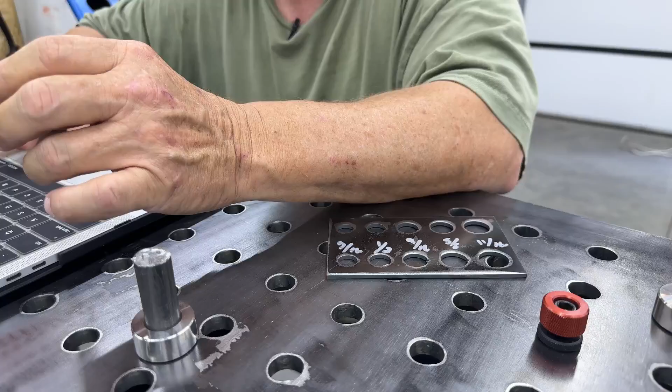That's me. Anyway, today I wanted to go over just a short video tutorial with Fusion 360 that even a beginner could take and design and build something on their own. So I know I've talked about in previous videos this fixture table that I just recently built, and wanted to go over a couple of things with you and show you before we get into the design process in Fusion 360.

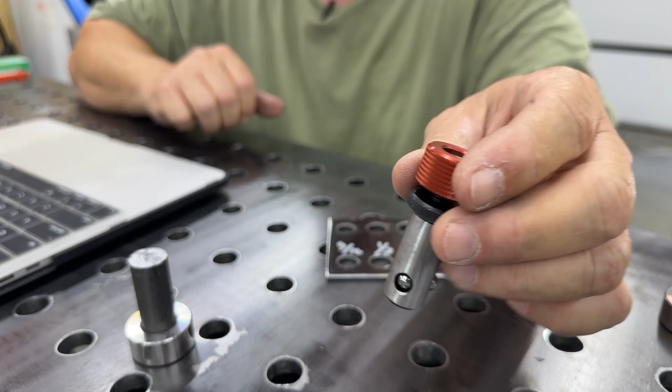But anyway, I bought a bunch of these little screw down clamps from Build Pro on Amazon so that I get a good clear picture of that. These are pretty neat. They've got ball bearings in them. You can see they're flexible, and as you screw this down, it pushes those ball bearings out and creates a lock, so they won't go anywhere after they're screwed down tight. And when they're not, they're flexible and they just slide right in the hole.

No problem at all. You notice I've got a lot of slop here. That's a different explanation. We might go into that in a different video. But anyway, when I had this table designed, I asked the guys down at the steel place to make 5/8 inch holes, and they asked me if I wanted them just a little bit bigger, and I should have said no, but they made them a little bigger, and now it fits more of an 11/16 here. I don't know if you can see that, but it fits more of an 11/16 design.

I had to remake all my fixtures to fit them in, but these will work just fine with what we're trying to do. The only issue, and I don't know if I can get a good clear picture here. Let's go back here where you can kind of see. So if I drop that in and tighten this up all the way, you can see I've got a long way to go before that's going to lock. To be exact, it's about 5/8 of an inch.

So I'm going to design some squares where I can square up whatever I happen to be welding together, and I'm going to just put a lip on it similar to a speed square. And I've got to create some holes in my new squares. I'm going to need 4 of them. So I'm going to have to design something, and I want it to where it's going to be tight on this and will fit loosely through the table.

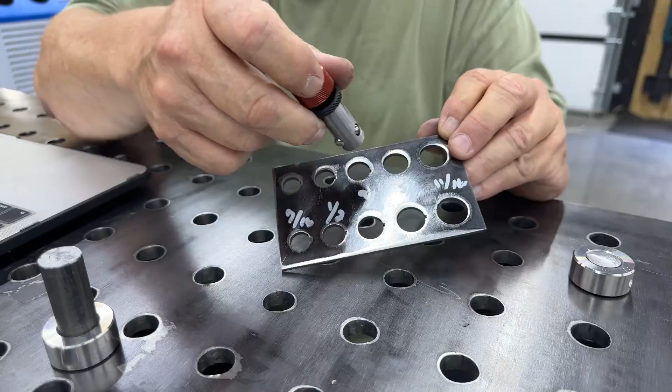So let me just unscrew this, and I did a little chart here that shows you different sizes ranging anywhere from 7/16 on up to 11/16. And these are the 32nd counterparts. So you can see this is supposed to fit a 5/8. If we push those ball bearings all the way in, and I push that in the 5/8, I still got a lot of slop. But if I take that down instead of a 5/8 to a 19/32, which is that hole right above the 5/8, a 19/32, then I get a much tighter fit.

And that's because of the kerf of the plasma cutter. The way I do my cuts, I have a 0-degree plunge where it comes straight in on the line, and the width of the kerf for that plasma cutter is a little over a 1/16. So I found that if I make my cuts just a 32nd smaller, they tend to fit perfect. So we're going to make all of our cuts to fit that 19/32 mark as opposed to a 5/8. So anyway, I hope that helps you understand what I'm trying to do.

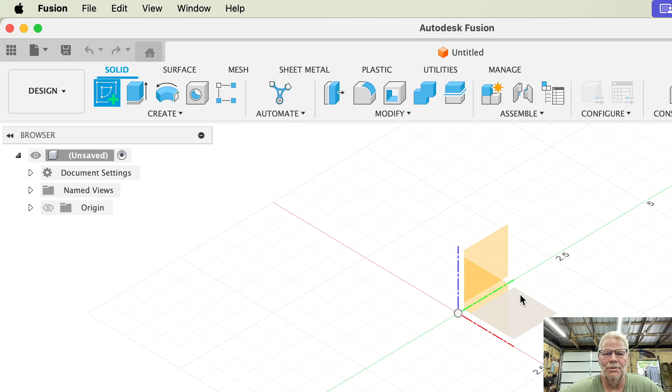So let's get right into it. We're going to open up Fusion 360 and start with the design process. So we've got Fusion 360 open. We're in the design section, and the first thing I want to do is create a new design. We always go into this quadrant over here, not this upper quadrant, but this one, and click here to start a new design. And your screen should look just like that.

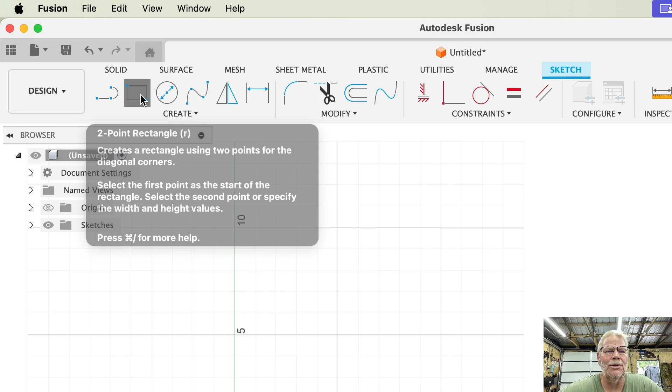I'm going to pull it over here and shrink it down just a little bit, because we're going to do a 12x12 triangle, and then we're going to insert some holes so I'll be able to peg it down to the table. So let's go ahead and get started. First thing we want to do is go up here to a 2-point rectangle, and we'll start down here in the bottom close to the corner, and all we've got to do is hit 12 inches that way, tab over, 12 inches that way. Alright, so we're good to go there. My next step in the process, I want to create some holes going up and down both sides. So let's go ahead and draw one of our holes.

And we'll be able to move this. We're just going to start one, and like I said, we're going to make this hole 19/32nds. If we made it 20/32nds, that would be 5/8. So we're just going to make it 19/32nds, and that'll be our first hole.

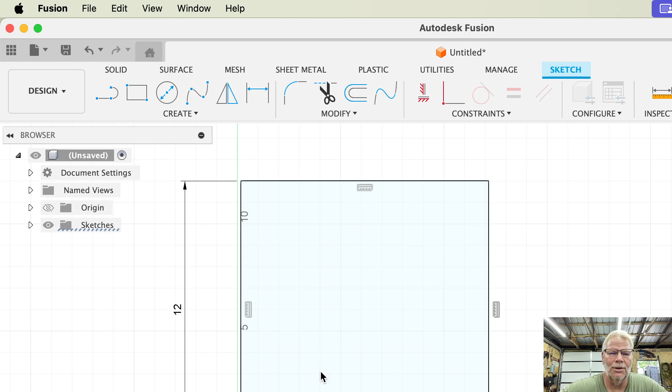And I want to leave myself some room to be able to weld onto the edges there, so I'm just going to kind of blow this up a little and eyeball it and see if I can get my first hole about where I want it, which I think about right there looks good. And then I'm going to draw me a construction line going up and down that I want to put my other holes into.

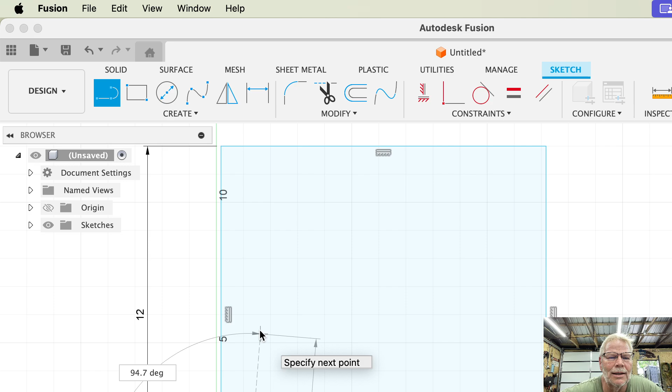So let's come over here to the line, and all we got to do is check right here to get a construction line. That's a line that we're going to draw, but it's not going to cut. So we're going to draw a line across here and double click, and then we're going to come down this way, and we want to stay centered, so we're going to click it right there, come up, we're at 90 degrees right there and 12 inches, so we'll stop right there. So that's going to be the line that I'm going to draw my holes on.

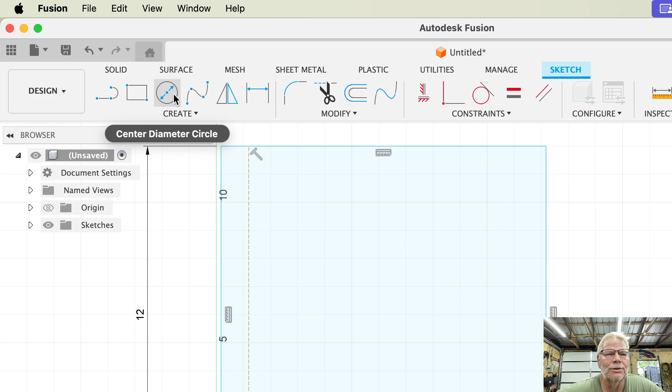So let's swap it off of construction line. Let's go back and create some more circles here that are 19/32nds. And I'm not sure how many of these I'm going to want. I'm going to space them on 2-inch centers here in a minute, because that's what my table is. So I'm just going to randomly put them in here for right now. And I guess I could put them at 4-inch intervals, but we'll just stick to this right now. And just bear with me while I draw these out.

Alright, and then I'm going to take my little measuring tool here just to see kind of where we're at. So I'm going to measure from the center of that one to the center of that one. And you'll notice that says 1 inch. I want 2 inches. Whoops, didn't want it to go that way. So we're going to spread this out a little further to get that to go where we want it to go. So let's scoot these on down. Get them out of our way.

Something's pulling that one back. I'm not sure what's going on there, but let's just keep rolling this way. And it appears like that one's not really on my line, so I'm going to delete that one and create another one. So let's go back here and start it right there. 19/32nds. Okay, now let's try again and see if we can get our spacing correct.

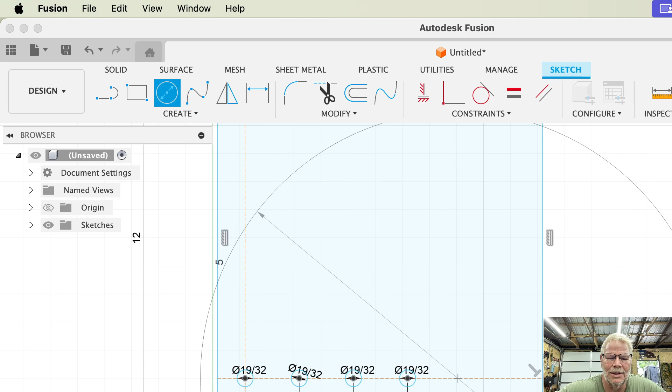So let's click there, come down. Let's put 2 inches. There we go. That's doing what I want it to do. Now we're going to go from there to there. Make that one 2 inches. And let's click from this one to this one. Come down, and we'll make that one 2 inches. And it looks like we got room for maybe one more. So let's go ahead and draw one in. 19/32nds, and we'll do the same thing to get our spacing correct. So we're going to move from that one to that one, come down and hit 2 inches.

Alright, now we need to go the other way. So we're going to do the same thing. We'll just kind of guess about where that is. 19/32nds. Let's get our spacing correct on that. Go 2 inches. Let's draw another one up here.

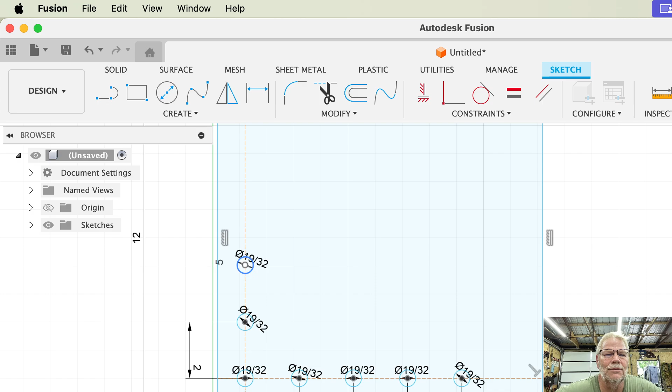And I'm sure there's a faster way to do this. And like I said, I'm still learning Fusion 360 myself, so just trying to do it the way that I know how to do best. And if somebody out there can tell me a better way, I'd be happy to change it up and try a little smoother way. So I think we got a couple more to throw in here.

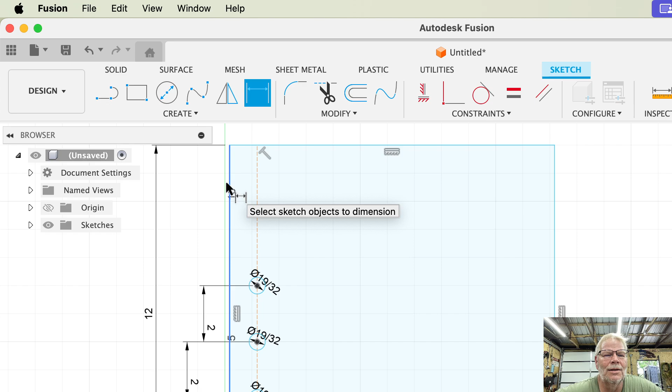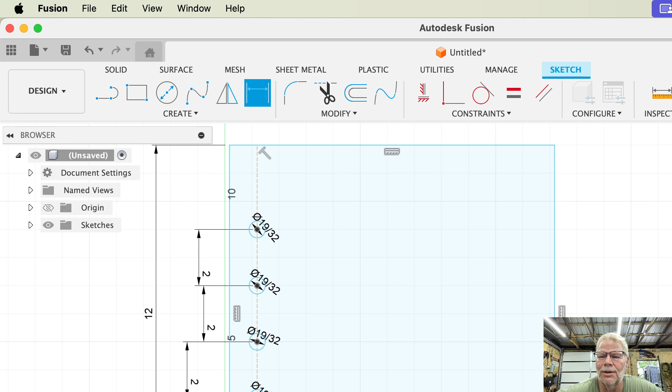Let's get our spacing on that correct. And one more. And I'm going to try and stay away from the corners because I'm going to create a triangle out of this thing here in a minute. Alright, so there we have it. We got all of our spacing, all of our circles where we want them. Next thing I'm going to do is turn the dimensions off so I can kind of see a little better what I've got going on.

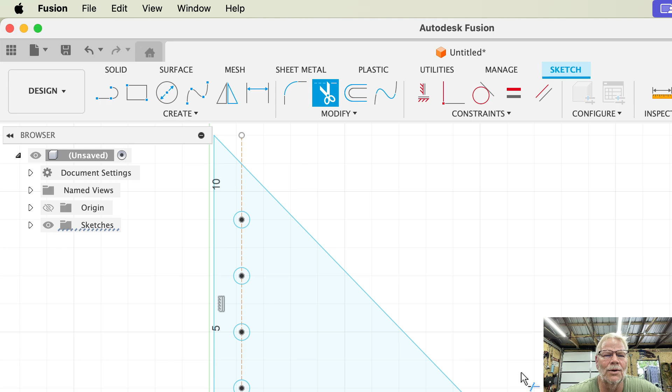Alright, and then the last thing I want to do is just draw a line from this corner up here down to this corner to create our perfect triangle, and then we're going to delete this top part here and here so that what we're going to end up cutting out is a triangle. I don't worry about these construction lines because they're not going to cut out when I go to do my manufacturing process. So I think that looks pretty good. I think that's going to make the kind of square that I want. So I'm going to go ahead and save this as table square.

And it will save to my admin projects. I'm going to save that. I want to go ahead and finish the sketch, which will be my next process.

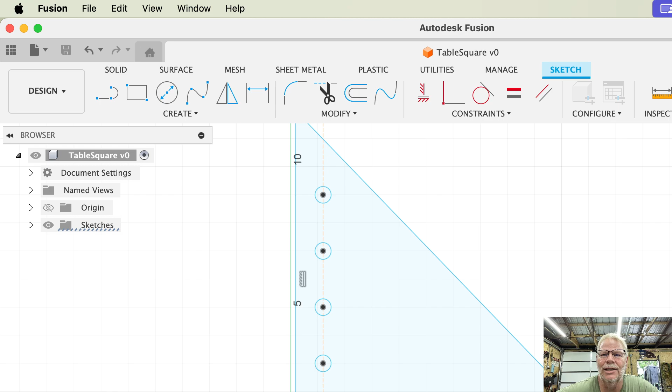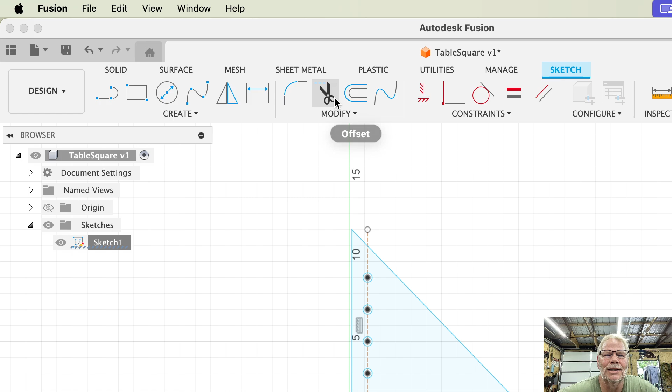And that shows that it is finished. So I'm going to get rid of these construction lines that are outside of the plane. All I got to do is go back to sketches, hit two fingers down and edit it. So go to edit sketch, and let's clip those off real quick just so they don't interfere with anything in the manufacturing process.

Alright, so we're going to finish it once again, and it automatically saves it. I don't have to resave it. Now we're going to go down to the manufacturing tab. So we've been in the design, now we're going to go down to the manufacturing tab.

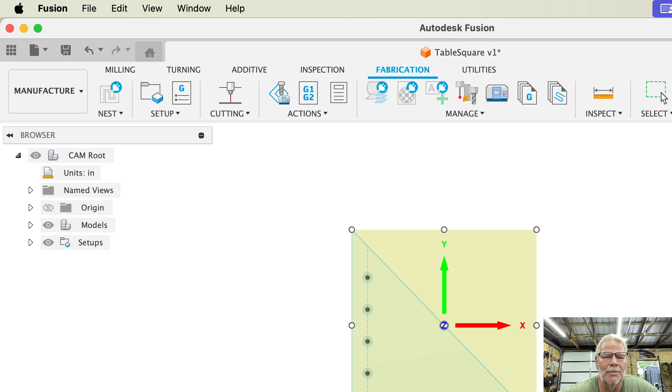So our first process will be to create a setup, and this is where it'll take your post processor that's already been uploaded into Fusion, and it's going to utilize it on how we want to cut it. First thing it's looking for is the box point, and this is going to be my starting position. I want it to start in that bottom left hand corner. I got to select my machine.

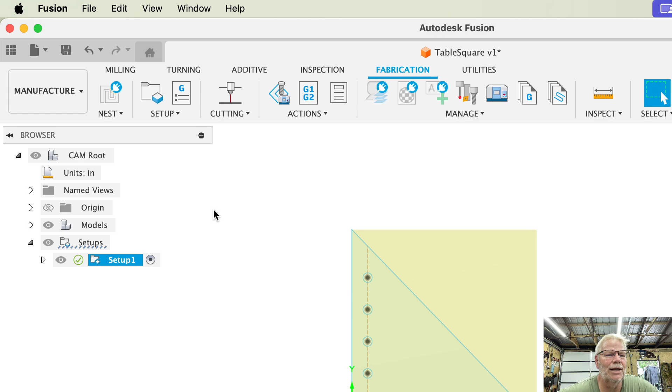Once again, we're using the Razorweld 45 here in our shop at home. And that's really the only thing, and then of course the sketch itself, the table square. That's all I've got to do for the setup process. So I click OK, and notice I get a green check mark that everything worked out well and it's going to do what I want it to do.

Next step is go cutting. Go to the cutting tool. We're going to once again select our machine. So we go to the library, click on the Razorweld 45. Alright, and notice my default is set to 80 inches per minute.

So I'm going to be cutting this out of 5/8 inch, and the best I can tell with the cut chart, I'm going to have to run this at about 12 to 13 inches per minute. So we're going to start with 12 inches per minute, and hopefully that's going to work out good. Alright, so we've got our tool selected, we've picked our speed.

Our next step is to go to what we're actually going to be cutting out. So we go back over here to models, just keep clicking down till we see our sketch, and click on sketch, and notice how it outlines everything that it's going to cut, and we're good to go there.

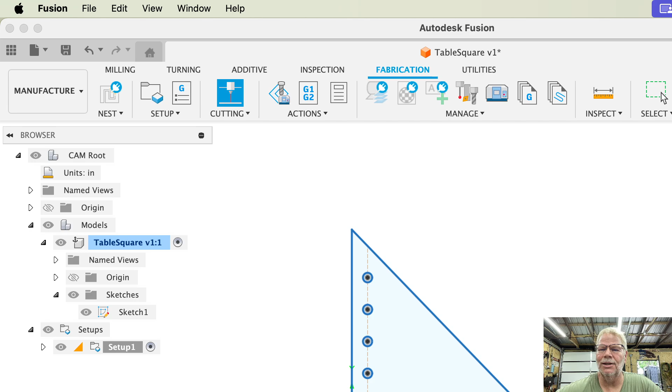You don't ever have to worry about the heights if you have a THC controller. The passes, if you look here, I've got my tolerance set at 0.004. My sideways compensation, I'm coming straight down, I'm not coming in from the side. My finishing overlap, you don't necessarily have to do that. I like it just to make sure the part falls out, so I have it overlap the cut, usually about 1/8 of an inch.

And then we won't fool with smoothing or feed optimization once again. Don't have to worry about keep nozzle down. Notice my lead-in radius I've got set at 0. My lead-in sweep set at 90, and my lead-in distance set at 0. My pierce clearance also set at 0. So we should all be good there.

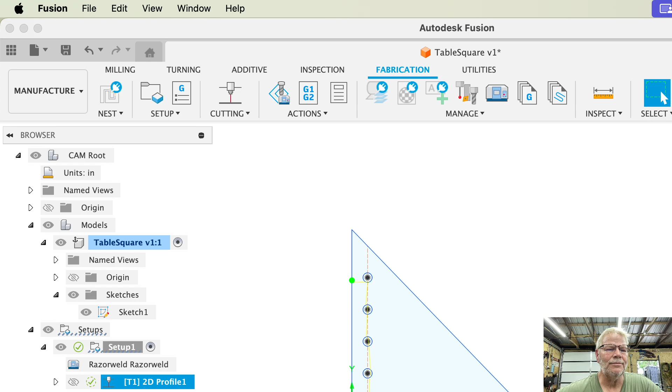So we're just going to click OK, and we're good. Our last step in this process is to go ahead and do our G code, which is the NC code, the numerical control code that the machine is going to use to cut it. So we're going to click on that.

I'm going to name this table square. And notice over here, just one thing I want to change as far as the pierce delay. We're going through 5/8 inch, so I'm going to change this to a 1, as opposed to a 0.5. And that's because it's going to take it a little while longer to get through that.

And we'll talk about that later. If you have any questions, just email me and I'll see what I can do to try and help explain it. So I'm going to give it a full second to pierce through that 5/8 inch steel.

All right, and the last thing is just hit post. There's my G code. It's saved in the right spot, so when I take it over to the table to cut it, everything should work good.